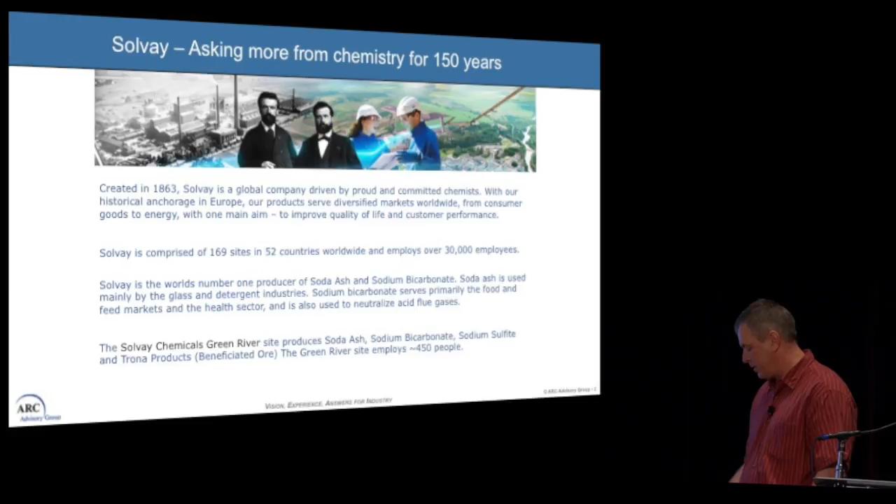The Solvay Chemicals Green River site where I work produces soda ash, sodium bicarbonate, sodium sulfite, and Trona products, which is beneficiated mine run ore. The Green River site employs around 450 people. So this is our site in Green River. This is the refinery site, sits on 150 acres. Our leased mine is about 40,000 acres. Most of our products move to market via railroad.

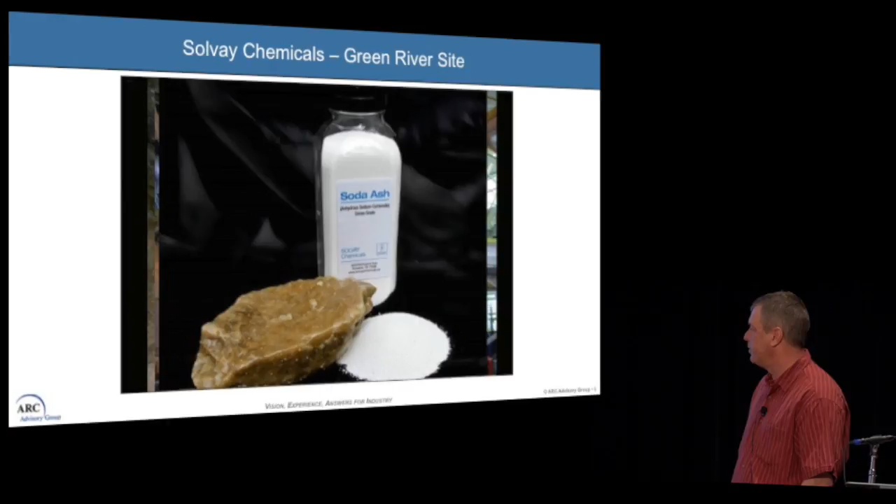Let's talk about our refinery control system. In 1998, we had a migration from Honeywell TDC 3000 to Yokogawa Centum CS 3000 system. Our first control system was probably put in 1990. So we had a major plant expansion where we added about another third onto our plant, and that's when we went to the Yokogawa CS 3000 system. Most recently, we did the 2014 upgrade to Yokogawa Centum VP R5. And that's what I'm talking about today.

Our control system resources: we have over 8,000 individually hardwired I/O coming into our control system. We have over 3,000 communication I/O points coming from SCADA systems, process safety management systems, and different PLCs around the plant. We have 21 field control units in 2 different domains. We have 17 operator workstations. We have 6 engineering workstations and 8 plant application servers. Our control system runs processes up to 20 miles apart.

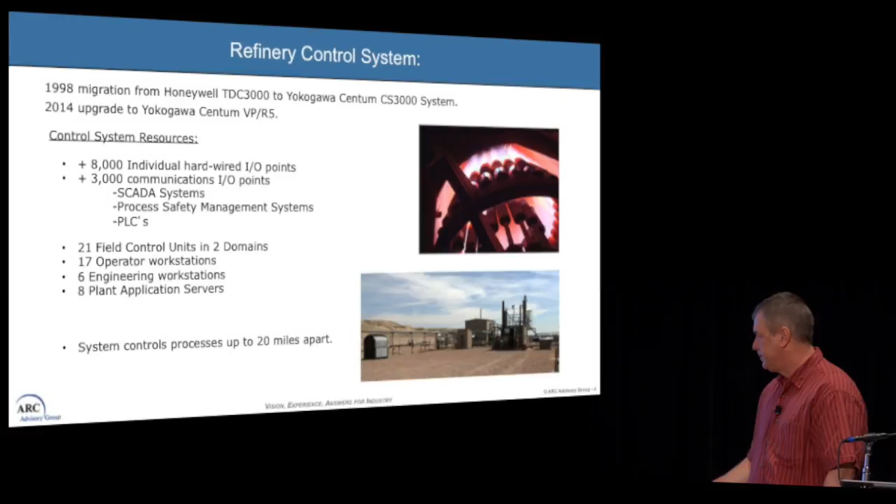So we had to come up with a justification for our upgrade. Probably the biggest thing we had was in 2012 we found out that Windows XP was no longer going to be supported.

We had a lot of communications between different plants and different companies, people that do what I do for our different plants that have the same control system, and we were trying to decide who was going to do it first, and I guess I just decided we were going to do it. I kind of hoped somebody else would do it first so we'd get the history, but we decided we'd go ahead and do it.

The cost and availability of XP computers went up exponentially for me for my control system. They went up 3 times what I could find in 2013 when they announced this. So I was having a hard time finding hardware. The hardware that we had on the PC side was dated. It was 7+ years old.

We tried to change out our PCs at about 5 years, but we were kind of hanging out. We heard that this was going to happen, and so we tried to get as much runtime as we could out of them. We were experiencing lots of hardware failures on our computer side of things.

You'll see under this desk right here, we had our operator stations, computers underneath the operator's desk. Hot, dusty environment. You can see there's actually some buildup on that computer, on the screen on the front of that computer. We were losing lots of power supplies and lots of video cards and computers themselves.

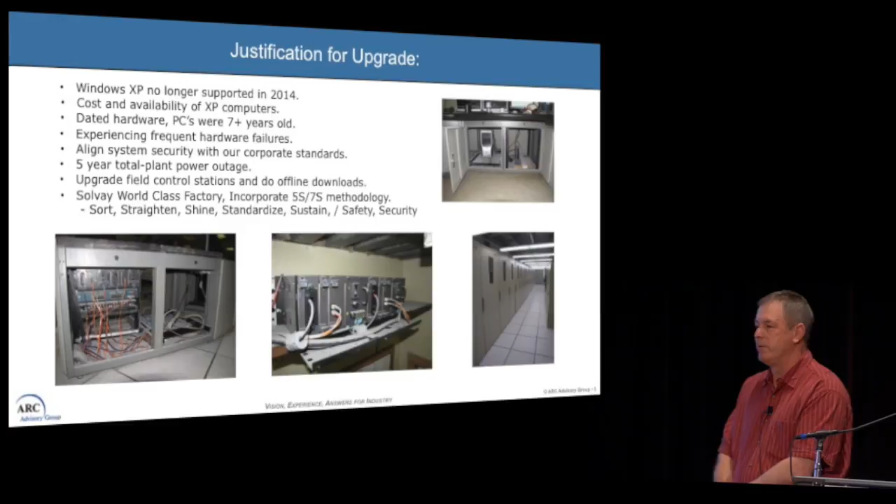Another thing that our plant adopted was, I think every plant probably has some kind of initiative going on. Solvay's is called World-Class Factory. We adopted this from the corporate level, and basically what World-Class Factory means is that every part of our business is world-class, and that's what we strive for. So we were feeling in the control side of things that we were lacking. We weren't absolutely world-class, and so we really wanted to try to get there.

So we had some challenges. Challenge number 1, and probably a lot of you know this, is procurement timing. We knew we were going to do this 2 years ahead of time. We knew that we were going to do it, and then we needed to save some money to do it. But the way money works sometimes, especially in our case, our outage that we were going to take was the last week in April and the first week of May.

We didn't know we had the money until the first week of February. So we couldn't pull the plug and do this till the first week of February. And that put us past our solution provider's standard lead time of about 8 weeks, and that would put us past our shutdown. So that was really hard for us.

And also, to implement some of these World-Class Factory things that we were doing, we wanted to have time to install new infrastructure. We needed to put conduit runs and fiber optic cables and new cabinets and power supplies and define clean rooms to put all this stuff in. So it takes some time. So that was quite a challenge. Challenge number 2 is just working in a plant that's offline.

Like I said, with our offline downloads to our controllers, the whole plant has to be down. The last time we did offline downloads to our controllers was in 1998 when we installed it, and that's pretty unheard of. It's really a neat thing we could go that long. We had several computer upgrades, platform upgrades, and still could run on those original offline downloads. So we wanted to take advantage of that. We knew there were some more features out there that we could probably get by doing that, so we wanted to take advantage of that.

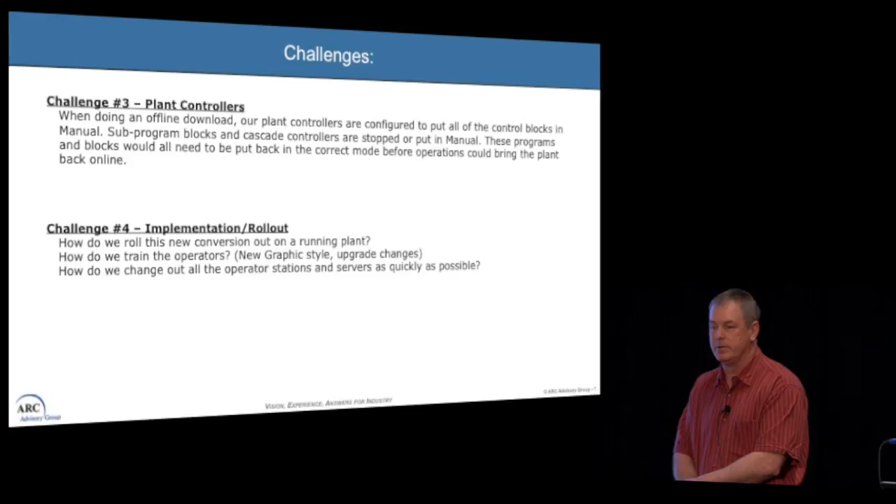So, coming up to solutions to the challenges, the solution to the financing is communication, right? We've talked about it in other sessions of this conference, and communication's the key. I communicated with our people for capital projects. I communicated to different departments. I got them all on board with what needed to happen. They were able to let me borrow some money from their budgets to put in the hardware that I needed. And then I was able to back charge that money back from our project once it got approved. We were pretty sure it was going to be approved, so we kind of went for a little risk there, but we borrowed some money from other people to do it.

And also, our solution provider worked with us really well to get the computers we needed on time. Like I said, they had normal standard turnaround times of 6 to 8 weeks. And they worked really well with us to solve that problem that we had.

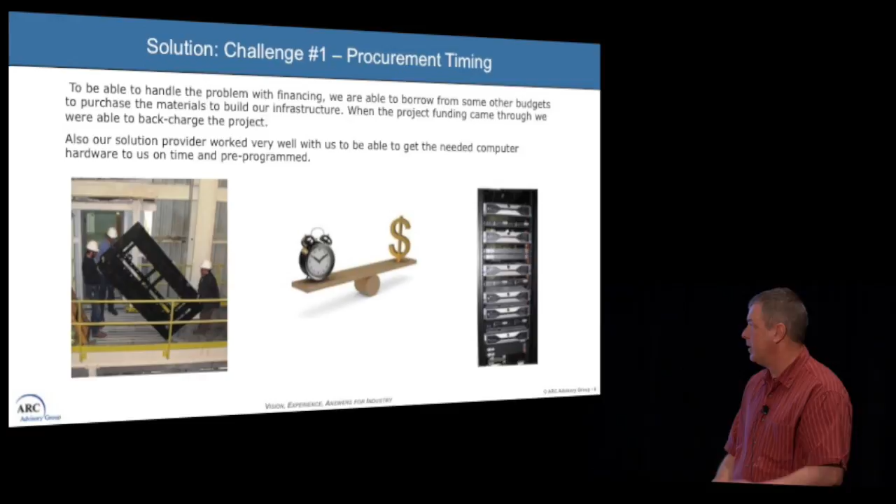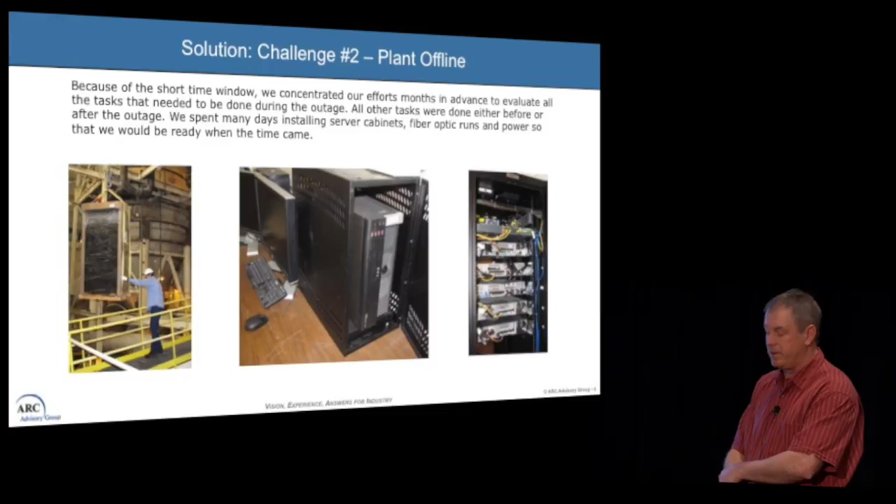So solution 3 on the plant controllers, that was quite a challenge to get everything back up so the plant could run. So before we did an offline download, there's a report package in our control system we ran. It told us what the modes of every block were. So we ran that, we did the offline download, we re-ran that report, and then we compared the 2 reports in Excel to tell us what blocks were in different modes. And it actually highlighted those blocks and told us which blocks needed to be changed.

So then we spent a couple hours going through the controllers, getting them all back into the right mode. And this is all in that 12-hour window. So we would do one, had 2 guys go back through after we did the offline downloads and get all those modes in, and then we just worked through all the controllers to get them all done. It worked out really well. So we ran that report. It was able to tell us what we needed to do. We got them all put back in the correct mode for plant startup when the power came back up.

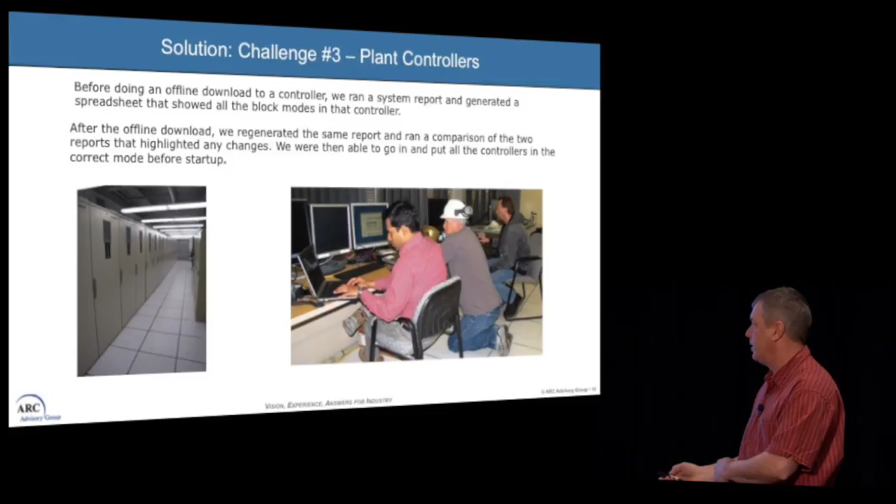Solution number 4 on the implementation part. Prior to doing anything, we were able to get with Yokogawa, and they had a tool that took our file of over 350 graphics and ran it through this tool that would convert it to this new widescreen format. And all we had to do was quickly go through it and make sure everything looked okay and worked okay. And that saved us months and months of configuration. I don't know how long it takes you people to build graphics, but we didn't have to go and rebuild all the graphics because of that tool, and it just made things a lot better.

And then for part of the implementation, each of our control room operators has 2 stations. They're pretty experienced operators. They've been through some migrations and upgrades before. But what we did is take 1 station down at a time. We put the brand new station up and got it running, which was another credit to our provider, that you can run both versions at the same time while you're cutting this over. I didn't know that was going to happen, but how great that was to be able to do that.

So we had so many machines to change out that we went around and changed 1 for each operator, had a shift change in the middle, so got new operators back in. That gave them the opportunity to look at the old system and the new system together. If they had any questions, they could just go back and forth between the 2 and then use us as a final resource if they needed it. Then we came back around 2 or 3 days later and changed those other machines out, and we were all up and running. So that helped.

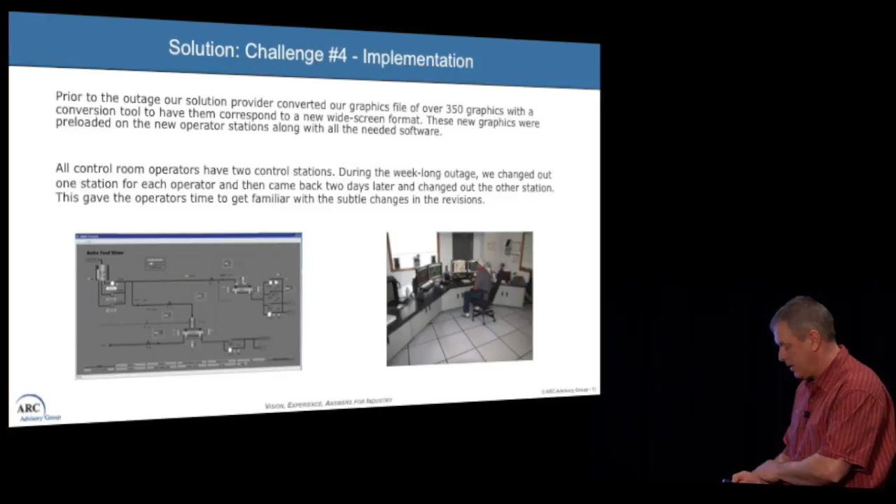So benefits or performance metrics on this, the hard benefits are really hard to define. We had a control system that was great before. We hadn't had a single failure on the control system side of things since 1998. So it's not like saying we're going to save a bunch of money or make a bunch of money by doing this, but there's a lot of soft benefits to be realized.

The one thing for us was better system security. Before, the operators could take a jump drive and just go like this into the computer if they wanted to. They knew their job was at stake if they did. Nobody had done it, thankfully. But they could always stick a jump drive in there. So what we did, we put KVM extenders to their desk. All the computers are down in a secure cabinet in a clean room that's climate controlled. So it gets it away from that opportunity for them to do something they probably shouldn't.

And through that, we get better serviceability of the equipment with rack-mounted machines away from the operators. We're not crawling under their feet every time we need to change out a video board or a computer, which is a disruption to them.

Also, our equipment, like I said, is in a cleaner environment, and there's a lot less failures. And then with any upgrade, you get the latest and greatest system options for the operator interface. Takes a little bit for operators to get used to. They're resistant to change, but when they find out these neat new features that they have, we went from the... graphics are all tabular now, so they can have 5, 6, 7, 8 graphics up at once, just with tabs, and they can go back and forth between them, and they really like that. That's just one of the many benefits from the new system.

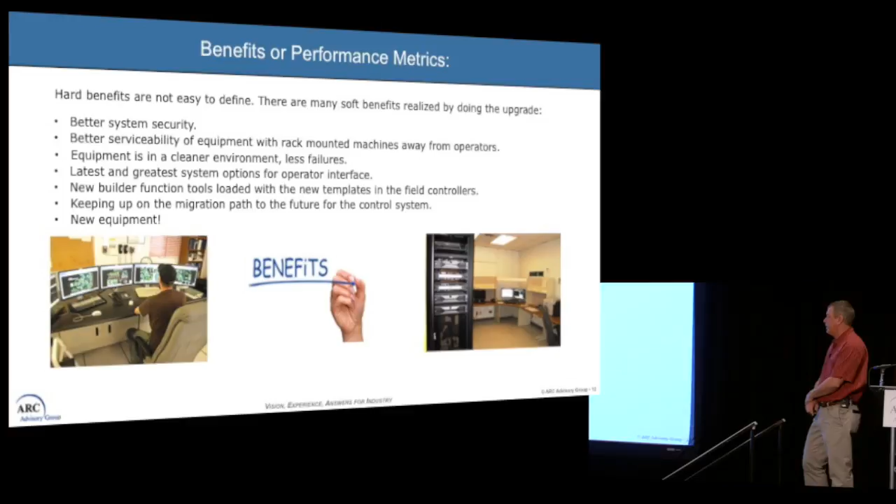And then for us on the configuration side, we have new builder function tools loaded with the new templates in the field controllers. We have more options, more control blocks, better functions than we had in 1998 when we put it in. And it's a great upgrade for us. Plus, on the software side, we're keeping up with the migration path to the future with the control system. We want to make sure that we keep up, be a partnership with our supplier, and keep on that path that we need to be, so we can provide the best value for our company.

And who doesn't like new equipment? I mean, we got all new computers, kind of take some of the heat off once they get burned in and everything works good. So we're enjoying the benefits of that still, a year and a half later.

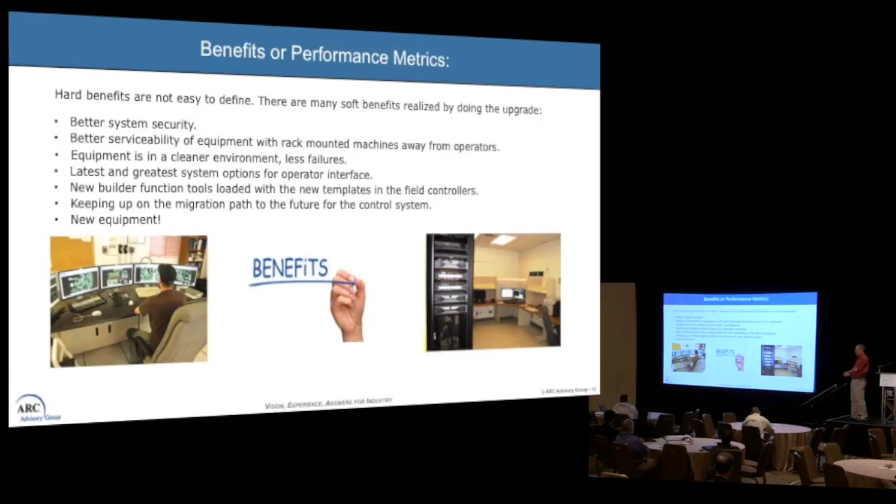Operators wanted me to put this in, my guys. They said, this is our control room before. This wasn't our control room before, but they really liked that picture.

So some of the lessons that we learned: you definitely need to understand your solution provider's migration path for the future. You need to be a partner with them and talk to them and sit down with them and understand their migration path, and give them your input about your migration path. Definitely communicate with them on that. Also, the importance of vendors' backwards compatibility through new innovation. It's wonderful when you can have a control system that can have 1975 technology that works in 2017 or 2016. It's a great opportunity to be able to do that.

Also, I guess one of the biggest things we learned on this was communication. Communication with our vendor, communication with our upper levels of management to be able to handle this. And also, we need to expose ourselves to best practices and be aware of the latest in innovation. And that's why we're at this ARC forum. That's why we go to our users conferences, to be aware of the latest in innovation, the latest offerings that our suppliers have for us. And stay ahead of the ball.

And when I say stay ahead of the ball, that means with this project especially, when we had all this work that needed to be done up front, on the front end, we didn't waste any time. We knew what we had to do. We didn't sit on our laurels and wait until the control system manufacturer showed up to help us do this. We did everything we could to get it done so that when they came, we had the 12 hours with them to take care of this.